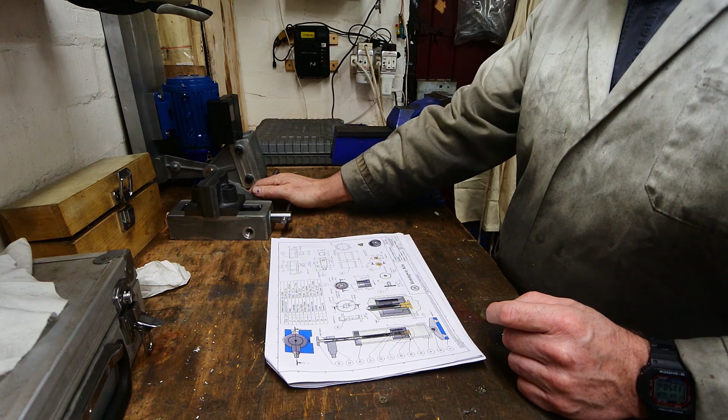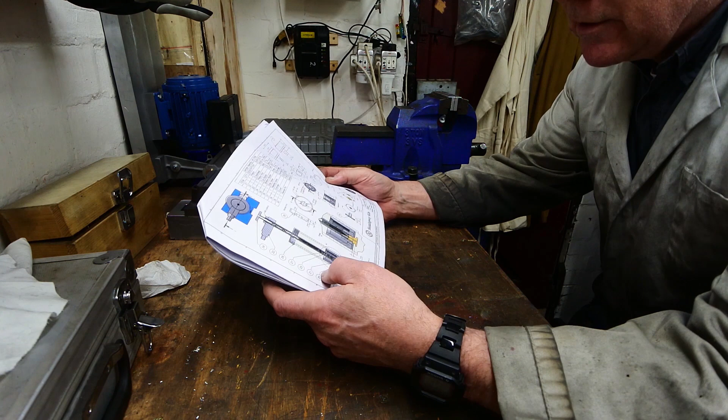There might be a temptation to go on and make the crank and the frame and everything else, which is the objective of the whole tool, but then the following work would become rather tedious. So the next big assembly is the hydraulic damper: a tube, a piston, some end caps, and an adjustable needle valve. Quite a few components to get going with. Once that's done, what's left will be the crank, the frame, a few brackets and bits and pieces, and some wiring.

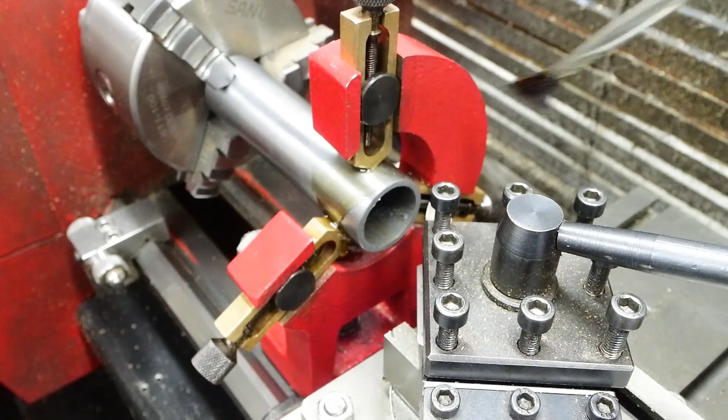So the next big assembly is going to be the damper. Don't want to be holding this too tightly, because I don't want it to end up not round.

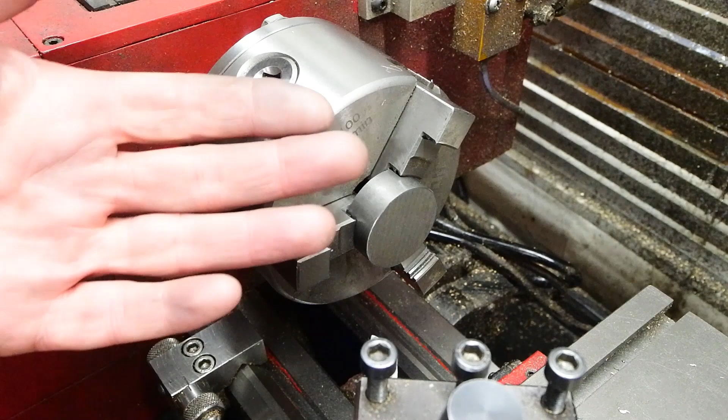So that needs to come out and turn it around. As you can see, they give you an absolutely giant piece of stock to make one of the end caps out of. It's going to come down to a lot of very thin material as well.

I'm going to face that off, ream it out to 8mm. It says 11/32 on the drawing, but the rod that goes through it is 8mm, so there's a mismatch of sizes there. Face it, centre drill it, ream it 8mm, and then I'll make a mandrel to hold this on so I can get to all the sides and features by bringing it on and off the mandrel after I've bored and drilled it.

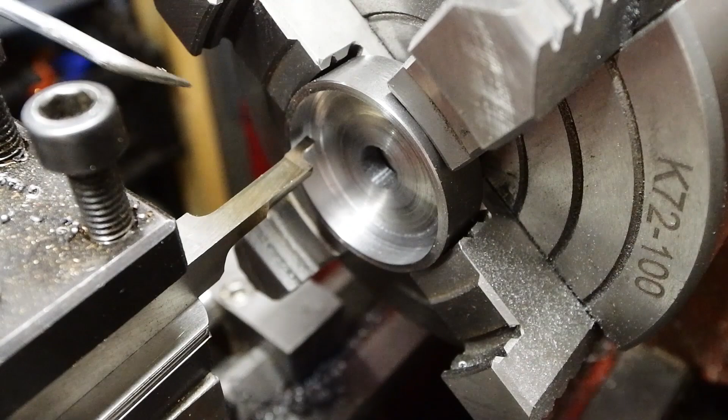The plan here is to use this tiny grooving tool to bring this inner diameter out to fit the tube in, then go into the depth, which means I've got to cut a groove into that bottom surface of about 3mm. I'll move the tool along and cut the groove depth around this hole, about 3mm deep, and then clean up the remainder that's going to be in the tube. That's the plan - I don't know if that tool is going to stand up to it, but we'll see.

Well, let's try this - it's a slightly thicker, slightly stronger tool. See how that goes along. It's not broke the tool, but it's not liking it.

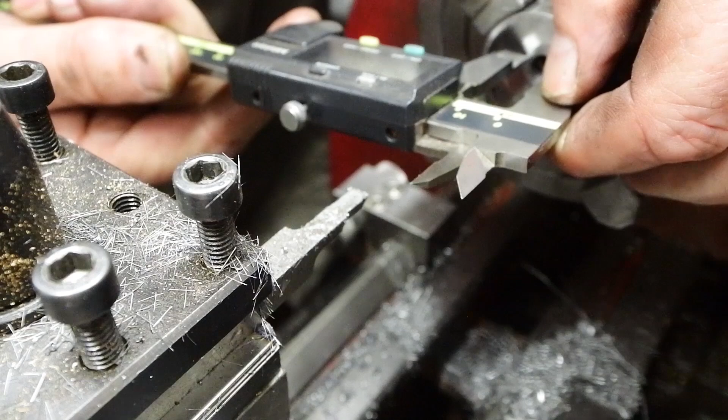Well, that was a pretty lucky hit. Just a clean up cut on there, and in we go - that'll press nicely. Yeah, we'll just go in there with a bit of a spring cut, I think. That's the top cap of the cylinder done.

Oh, the chatter. But never mind, probably better made out of aluminium again. Some of these parts are in some odd materials, they really are - aluminium would have been a lot easier.

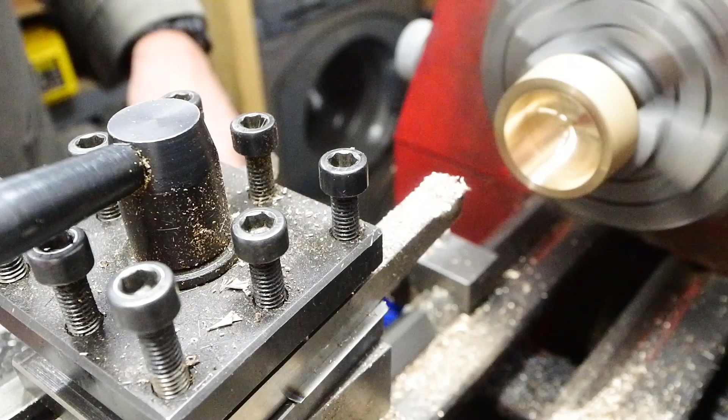I'm going to try and keep the casting radius in here, we'll have to see how that goes. I might end up milling off this casting surface or leave it there - we'll have to see.

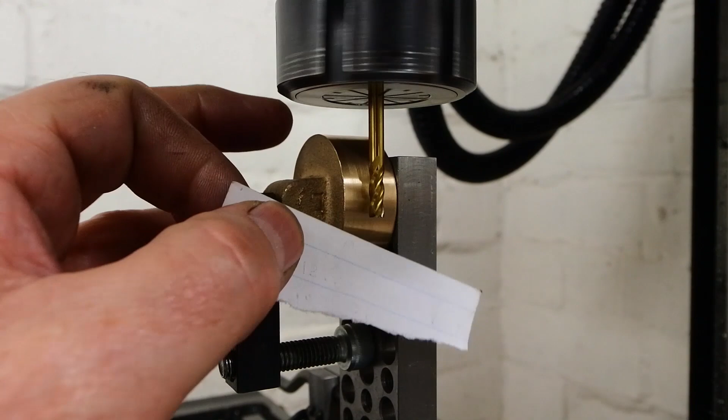Okay, so that's 0.1 away from the surface. Okay.

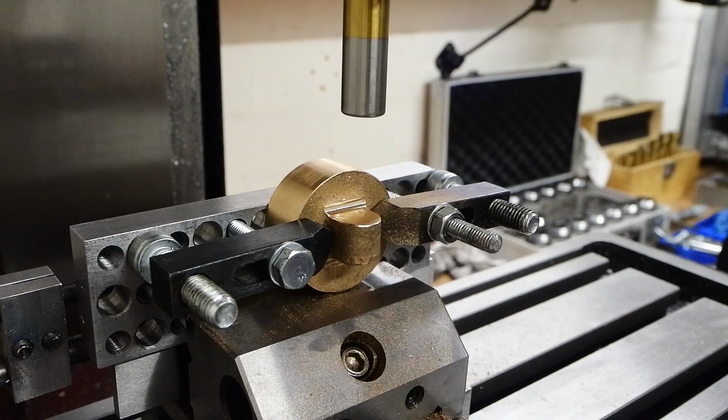Now I have actually cocked this up. I did originally want that to be 14mm wide, but messed up in the arithmetic in moving over. So this is now just 12mm wide and it's a little bit off centre. I've taken far too much off this bottom edge here. In the drawing it wanted it half an inch, so I'm not too compromised on that, and I'll just have to deal with the off-centredness of it with the location of some of the other parts. It's not really critical, but it's annoying.

That now needs a 6mm reamed hole in it. This is a 12mm pin, upside down end mill, and that is centered up on the radius of that boss. That's the only dimension that the drawing holds on that - hole in the center of that radius.

Not a brilliant execution, but the casting's all over the place anyway, so that was never going to be centered in all respects, but I didn't have to make it worse, did I? Some lovely jaw marks there where it nearly got dragged out of the four-jaw chuck. And I've put lots of dents in here as well, clamping it to the plate. So not a very good part at all really.

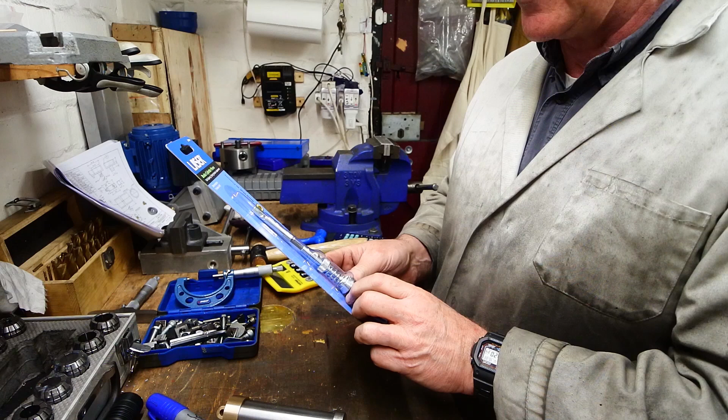So the new tool has turned up - a brake cylinder hone. Every expense has been spared on this, I assure you.

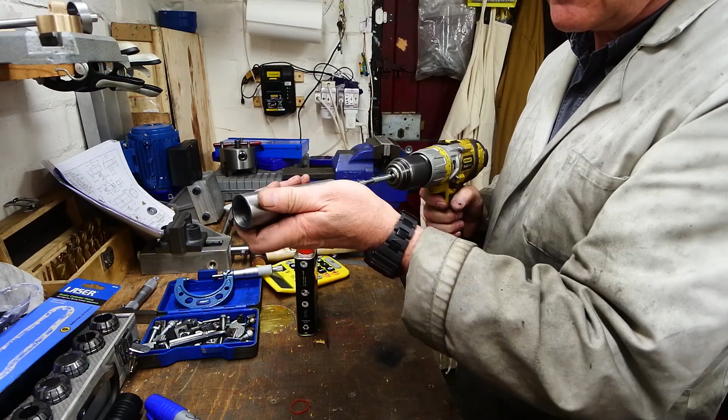So hopefully we can regard that as cleaned out and pretty round. I suppose I'll use this again one day, I don't know when.

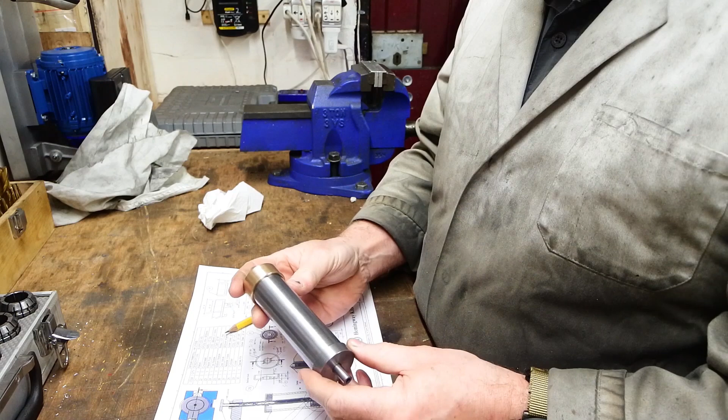With the cylinder making good progress, next thing will be the piston, a little chunk of cast iron here. When I look at the drawing for this, it's got a few unnecessary features. There's an unnecessary groove or counterbore in the bottom of the piston - it doesn't serve any purpose and it'll be very difficult to machine.

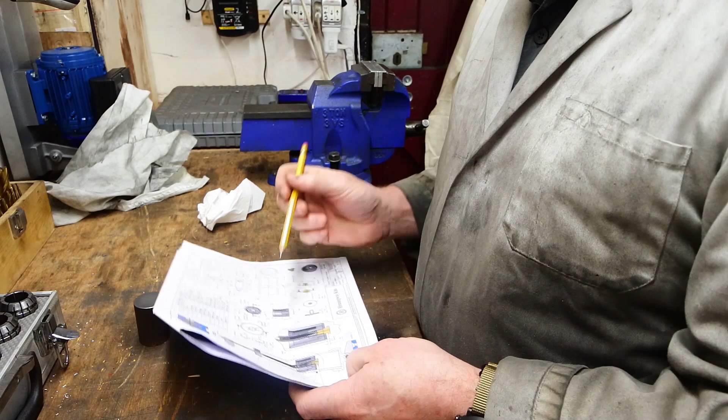There's also this chamfer, the 20-degree chamfer in the skirt of the piston. It doesn't do anything except the inside diameter is dimensioned off of that chamfer, which is kind of absurd. This has the look of something that was fabricated initially and then somebody drew it as a single part.

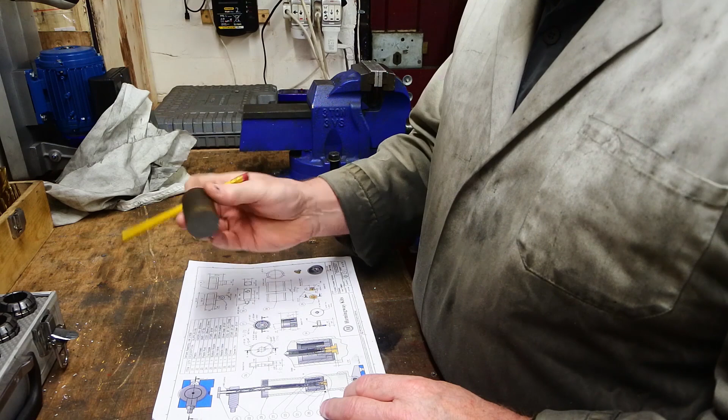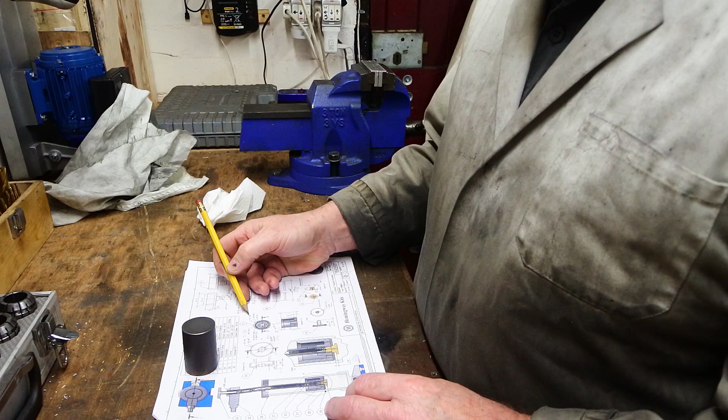So I'm going to base this on what these dimensions are, but some of the dimensions I'm going to have to make up myself or infer from some of these other bits and pieces that are put on there. I mean, there's a dimension there, for example, 51/64 - is it really? Okay. There's another dimension there, 1 inch and 42 thou. I really don't know where they're coming from.

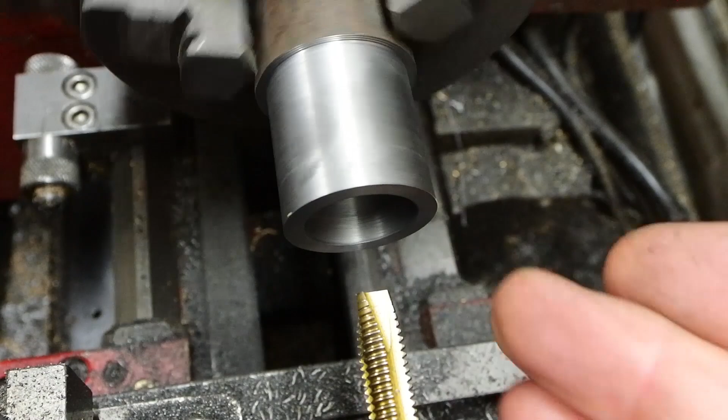It's probably going to have to be forged or chucked - another giant piece of stock they give you. Now that I've got this bored out to 20 millimeters, it doesn't really matter what dimension it is, but it's 20 millimeters diameter, 14 millimeters deep, kind of matches the drawing. I've drilled all the way through nearly - certainly when it's parted off it'll be all the way through.

And I just want to get this thread started. Don't expect to be able to cut the thread all the way through, just get it started so it's square, and then I'll finish it off by hand after I've parted it off. So just make sure I can reverse it - yep. And in we go, as usual with a keyless chuck.

Loosens up when it goes the wrong way. But it hasn't worked out perfectly with the parting off, because I'm going to have to dig into this shoulder here a little bit to get me 25mm length out of it. Really do need to improve on that.

This is the piston. It's got a counter bore in the back of it of 20mm, so with a 20mm mandrel secured with a nut and a stud, I can centre up this piston, and it is centered up. It's in a hexagonal collet block on a stop, so all I've got to do is move the table over by 8mm, drill a hole, move it around one flat, another hole. That'll give me my 6 holes at 16mm pitch circle diameter. Couldn't be easier.

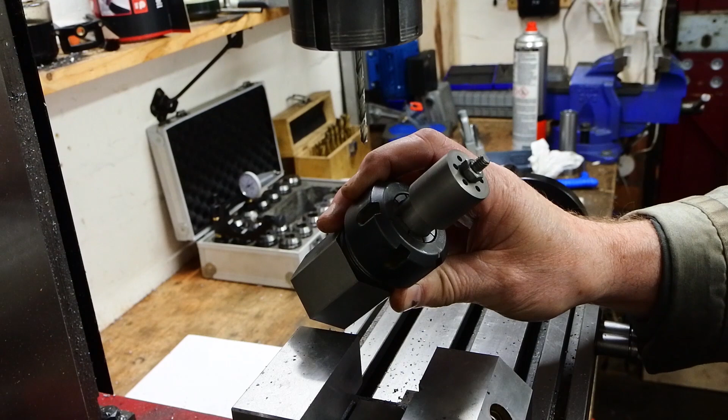So there is one piston with its 6 vent holes, or valve holes, whatever you want to call them. Just got to get it off the mandrel now. Hope it hasn't gotten stuck.

Clean up and a tiny bit of deburr aside, it's one finished piston. Yay!

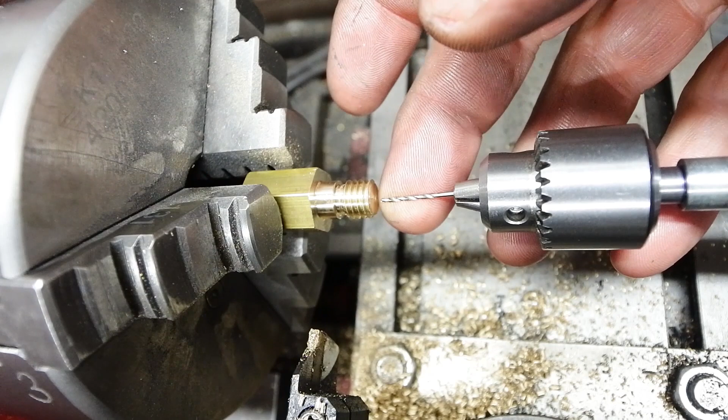Now this requires a 1mm hole all the way through this screw, so I've got the sensitive drill. The way this works is that it's free to spin, and you just hold it with your fingers and push it in. That way you get the feel of whether or not it's snagging, whether or not it's drilling. And it's not even in straight, is it?

Did wobble about a bit. There is a needle that's going to go in there, and if I put a countersink in the hole, it'll be able to find the hole when it drops in. So that's a 90-degree spotting drill. That should fall in there.

Yeah, hole did come through. Broken the corners on it, I'll just clear that. I'll just clear that hole with the drill, and that'll be that bit done.

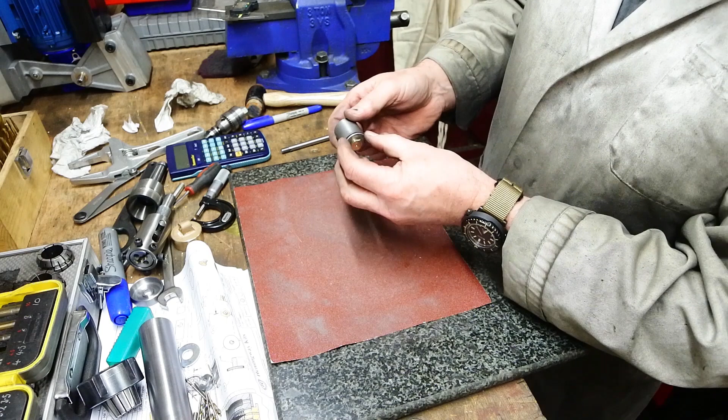So that disc is the one-way valve, which will allow the piston to lift up. It'll flush all of its oil through those 6 holes. Coming down the other way, the oil's got to go through that little hole, which will have a needle sticking in it to adjust it.

Make sure it moves freely, otherwise it will be very embarrassingly not work. It fits in there, got all kinds of grit in it, no doubt.

That goes on there, it's got to be soldered in. That's the cap for filling it. Well, you can hear it's even working on air pressure. Yeah, could go into the pump business.

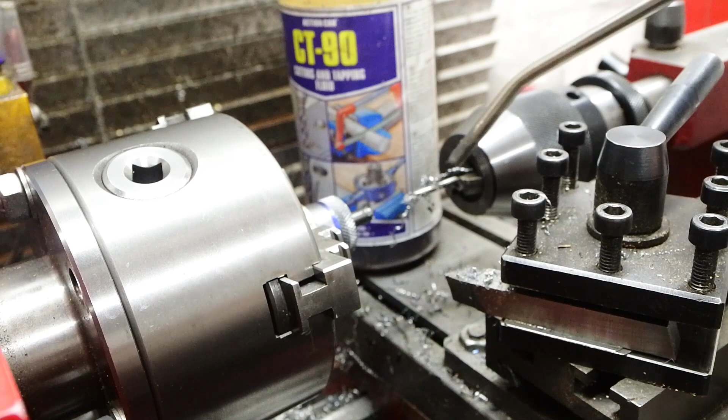So that's gone in about 12mm, which is way up the flutes on this. Could be a straight hole. It's not hot, it's just that my fingers are cold and can't actually feel them.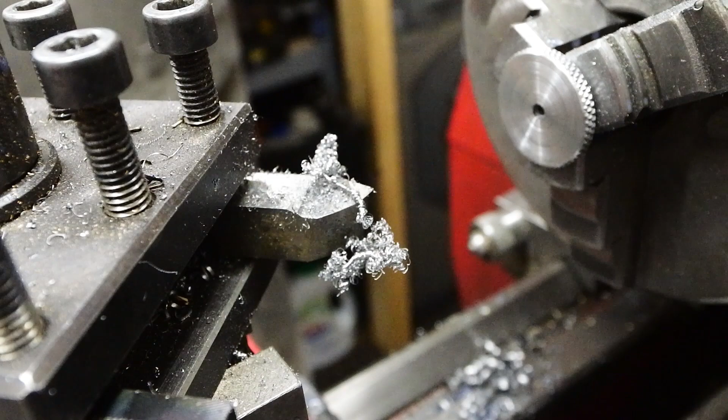So there we go, and this needle is expected to fit in there, and what the assembly notes say is sweated in, whatever that means. I think it means soldered. I might think of some other way to peg that in, or I might have to solder it, don't know.

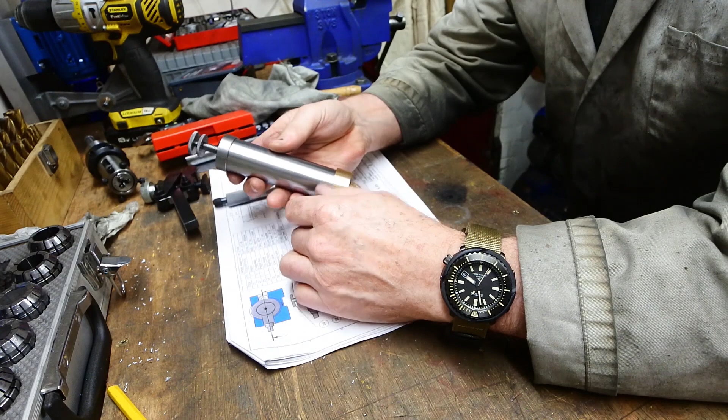As a dashpot or damper, that's pretty much all of the parts made. There's a couple of bits that need to be soldered together, but I'm not going to do that until I have to, in case anything needs to be changed.

Messed up this pivot on the end there, that's not in the centre, so I'm going to have to somehow compensate for that with some of the other parts, but it's a good snug fit on the end. The piston inside, that's a good fit, that's all okay.

This disc on the end is a one-way valve, so that it only damps one way, so when you pull it up it opens, lets all the oil freely flow through. There's a pinhole there, a 1mm hole, and when you're pushing the piston down that will seal. The oil's going to have to go up that little hole, but it can't get out unless that needle has been lifted out of the hole.